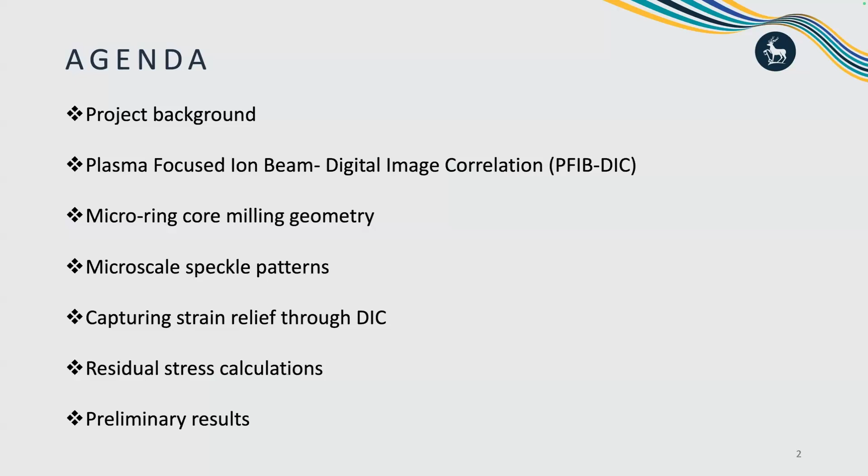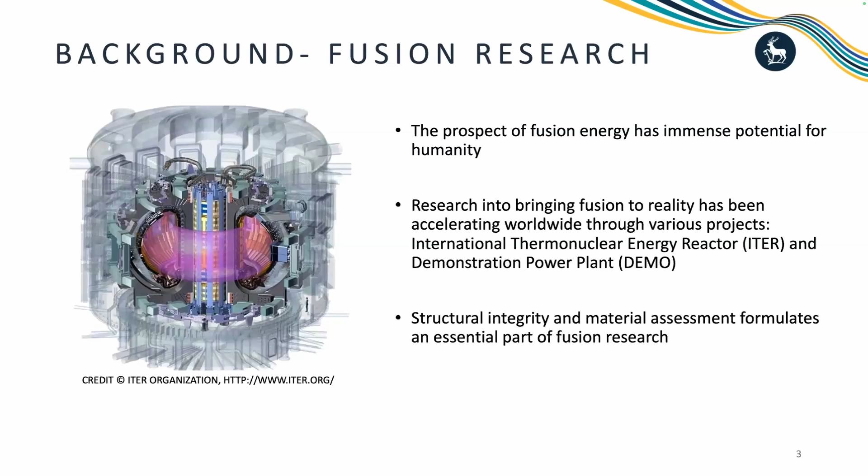So I'm going to tell the background very quickly about nuclear fusion. Similar to other topics, structural integrity and materials assessment is quite important for the nuclear fusion joint. His work is mainly about the joint at the divertor, to achieve thermal transfer efficiency and also maintain the structural integrity of the components. The joint is made of copper-chrome-zirconium and tungsten, with copper as the interlayer.

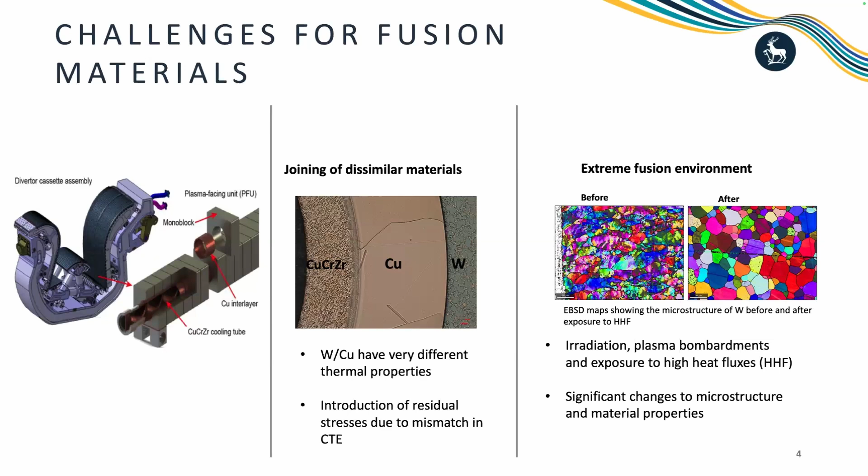Because this is a dissimilar joint composed of many materials, it's quite easy to have residual stress induced into the joint. I'm going to skip that because we talked about it three times. Then there is his main technique for characterizing the residual stress: because these are dissimilar joints with many interlayers, the region between different materials is quite narrow.

So conventional techniques like neutron diffraction are not very suitable for these materials, because the neutron spot size is about 1.4 millimeters, but the interlayer or interface of these materials can be less than 1 millimeter. So we have to use high resolution techniques, which is the plasma focused ion beam and digital image correlation method. We remove the restrictions using the plasma focused ion beam to release the residual stress.

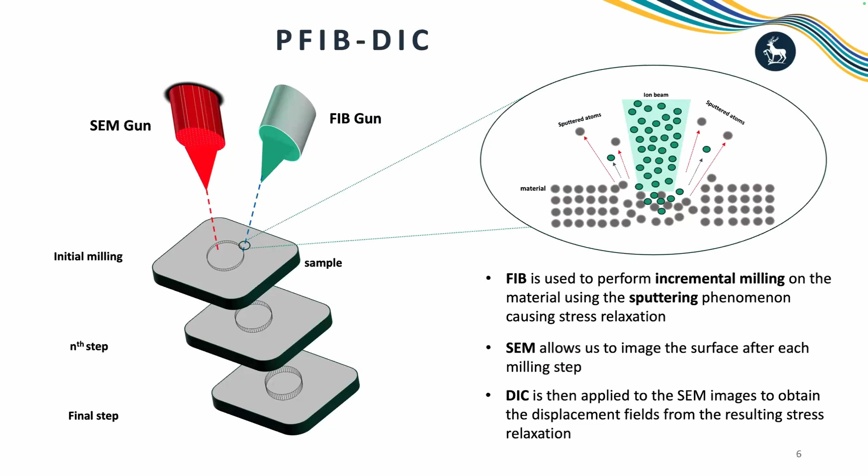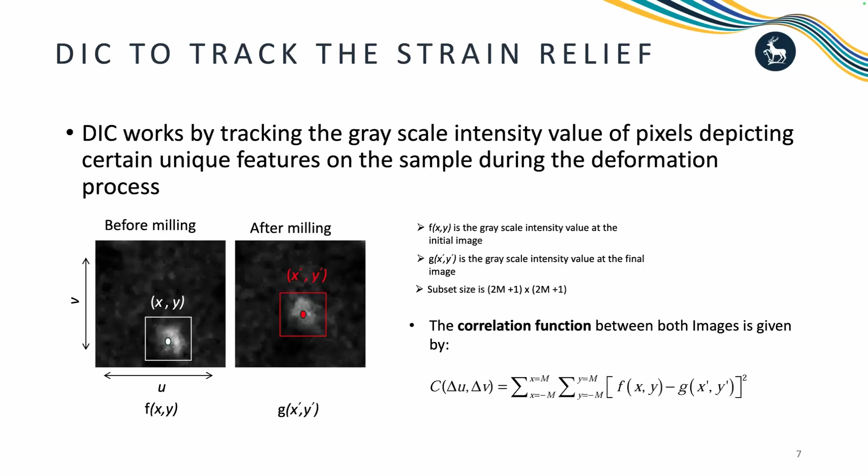After each milling step, we use the SEM to take images and record the stress release procedure. Finally, we use the DIC to analyze the stress release and achieve the measurement. Here is the basic mechanism of how DIC works: the software or algorithm checks the similarity in this window and calculates how the material deforms during the stress release.

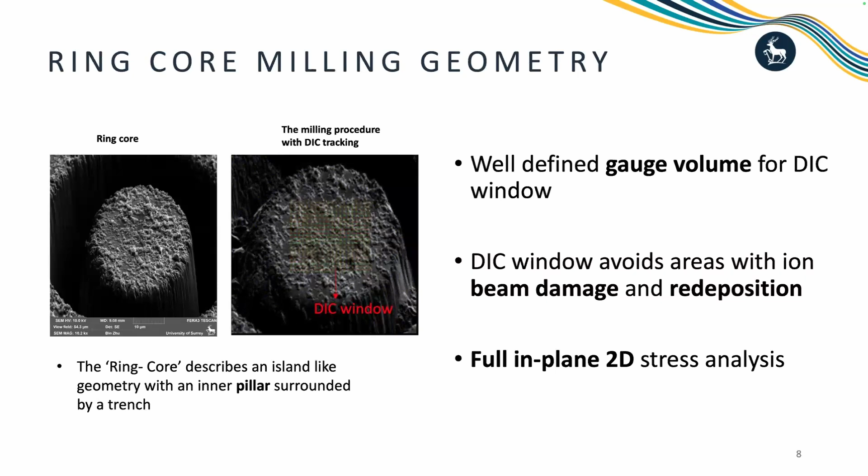Here are the experimental procedures. We do incremental milling, take the SEM image, and use the DIC to mark this region and analyze its deformation during the stress release. After the calculation at each incremental milling step, we fit the stress release value at each incremental point, and finally use this master curve to get the residual strain release results.

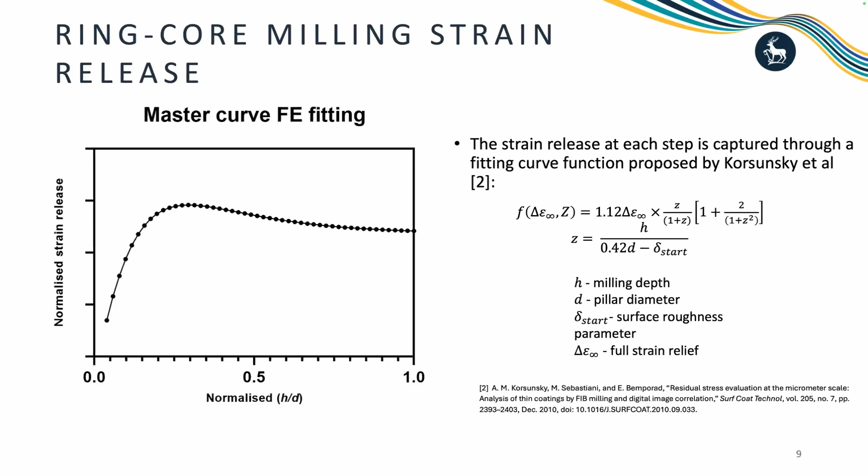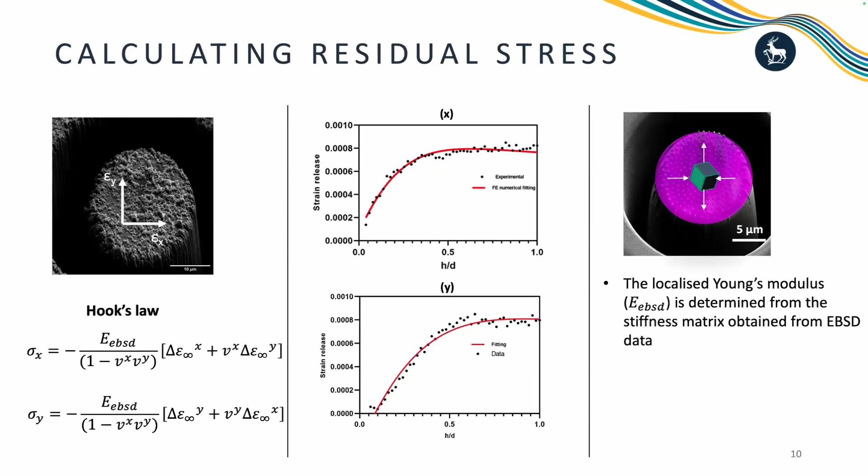Because copper and tungsten have relatively large grain sizes, and the milled pillar size is not large enough to get bulk properties, we apply EBSD to measure the grain orientation in the measurement area, calculate the anisotropic Young's modulus and Poisson ratio, and apply that to Hooke's law to calculate the localized residual stress distribution in different directions.

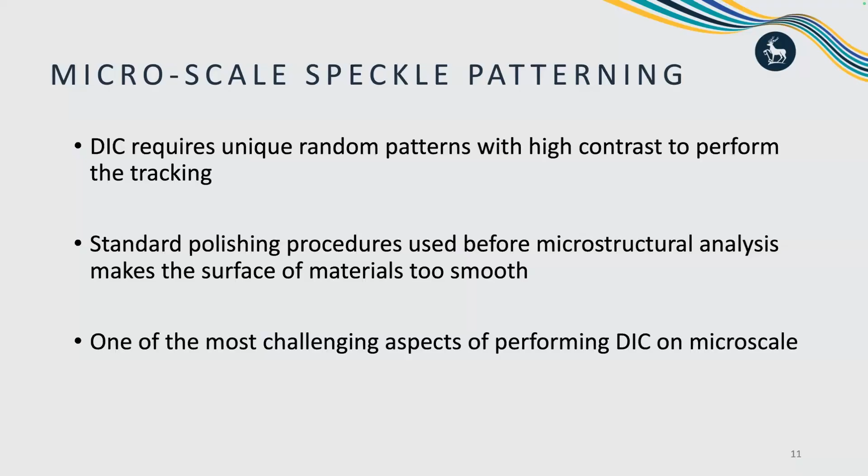For the DIC technique, the natural features of some materials are not very helpful for the analysis because the surface is too smooth and there are no features to be tracked during the correlation. So we need to generate artificial features to help increase the accuracy of the DIC analysis.

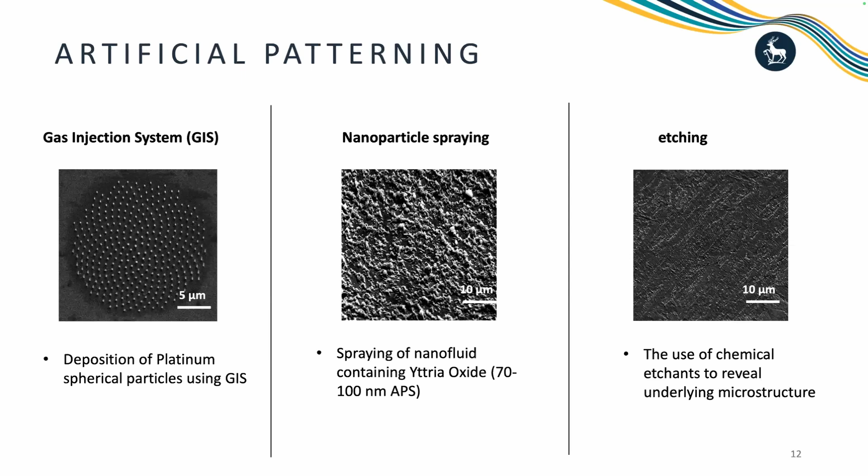Here are three general methods: particle deposition using the GIS, nanoparticle spraying, and the last one, etching. After etching, it actually uses the natural particles of the material. Each method has its pros and cons. Etching is cheap and fast, but not suitable for every material. Deposition is a kind of universal method, but it's really time consuming and the source is quite expensive. So we have another option, which is nanoparticle spraying.

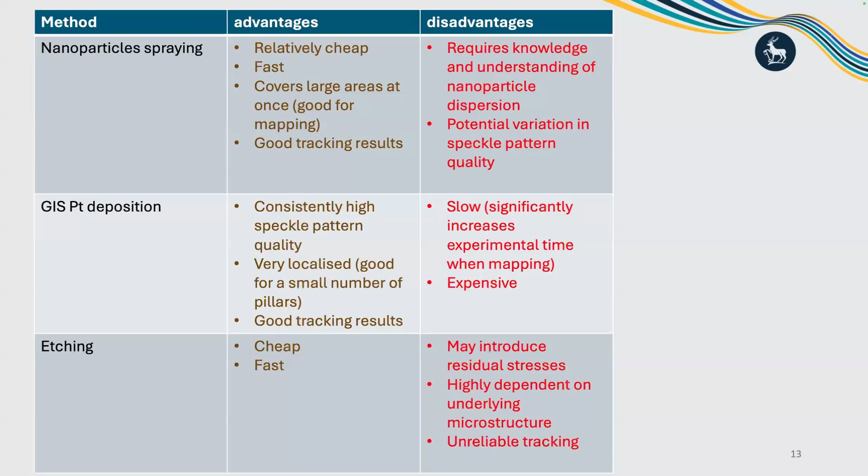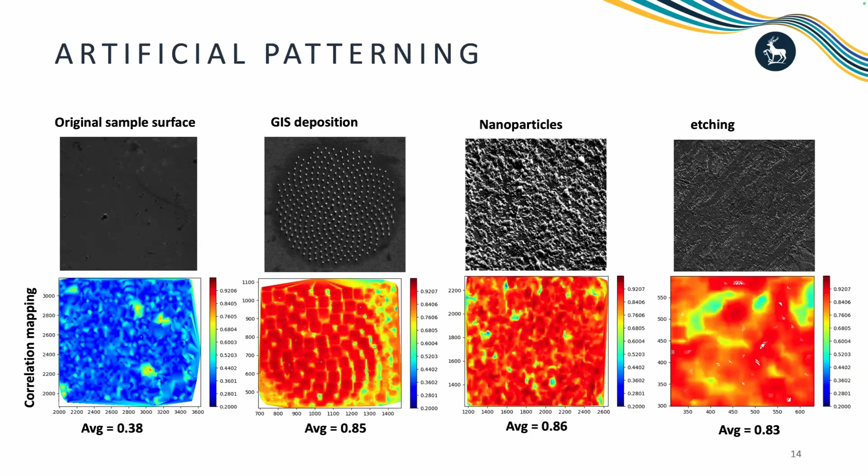It can increase the quality of the speckle pattern. Let's see the results of those three methods. The first one is the original surface without any treatment, and we can see the correlation coefficients of each map. The other three methods gave quite similar correlation quality, and the nanoparticles slightly win this competition.

Then here are the plasma focused ion beam DIC results of the residual stress distribution. The interval between two measurements is about 200 micrometers, and we can see the distribution along this line scan. We find tensile residual stress at the tungsten-copper interface, balanced by compressive stress on the two other sides.

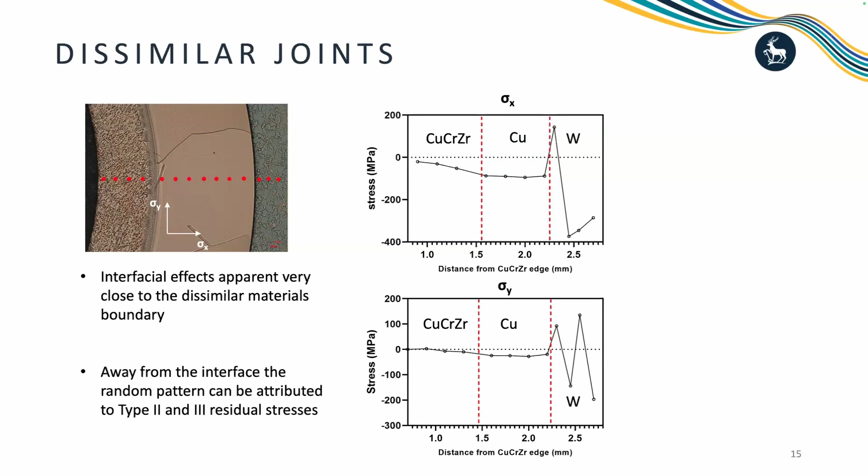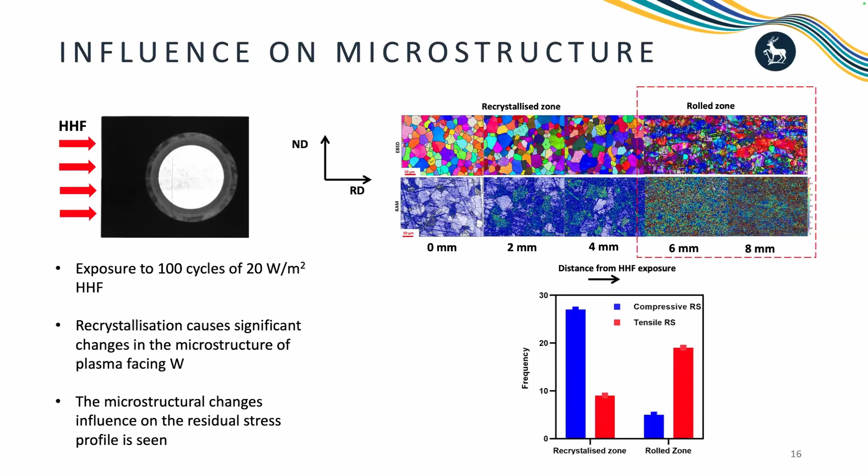In his work, he also studied microstructure effects on the residual stress distribution, because his sample suffered high heat flux. After the thermal history, recrystallization happens and the residual stress is released in that field. We can find the results here, but the unaffected region still keeps the residual stress in the material.

So here is the importance of this method. We have two key points. Firstly, we can measure residual stress at high resolution. In this case it's 200 microns, but we can make the resolution much higher. So for materials with complex interfaces, we can really measure the details of the residual stress distribution.

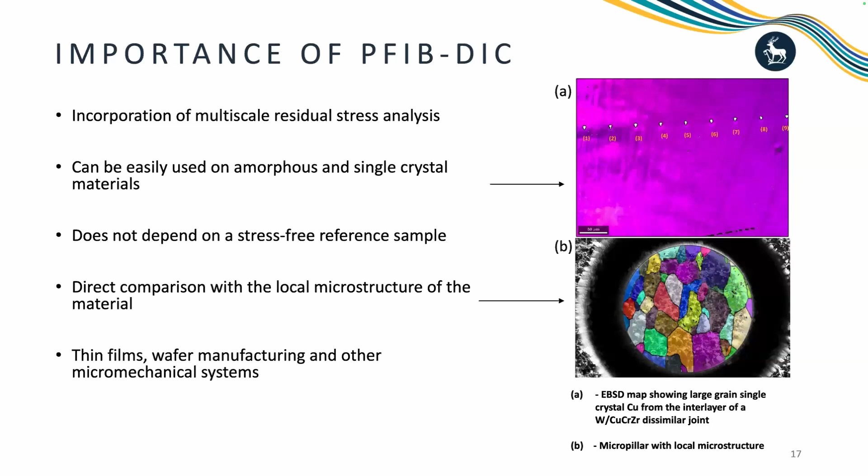Another thing: we can correlate with the microstructures to find the localized Young's modulus and Poisson ratio, and find the real residual stress distribution in the localized space. That's it.